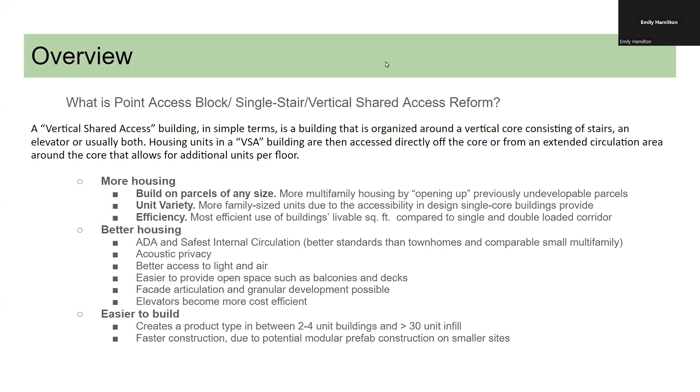Next slide. So what is it? Vertical shared access is a building layout that involves having a vertical structural core, most likely composed of an elevator and a stairwell that leads into units. Unlike what the colloquial single stair name may suggest, this layout is much less about stairs, but rather circulation inside of a building. It's about how people get in and out and move around to enter and exit units in a building.

Vertical shared access layouts are in many ways better than what we build today. And that is because they allow for one, more housing. You could build on any type of parcel size. Two, you could build any type of unit layout. Three, they're the most efficient with buildable layout.

They're better housing. They're better with ADA access. You can move to and from your unit from the outside easily. They're quieter buildings with more sunlight, with cross ventilation and airflow. And they're good with elevators on small parcels.

And lastly, they're easier to build because building constraints are lessened. You're able to build just about anywhere. And it's faster because you could standardize building. Next slide.

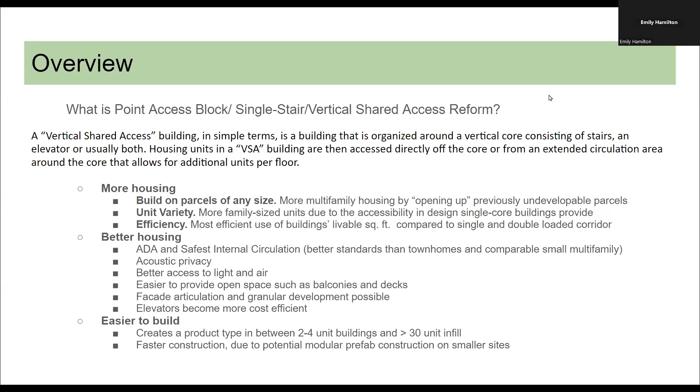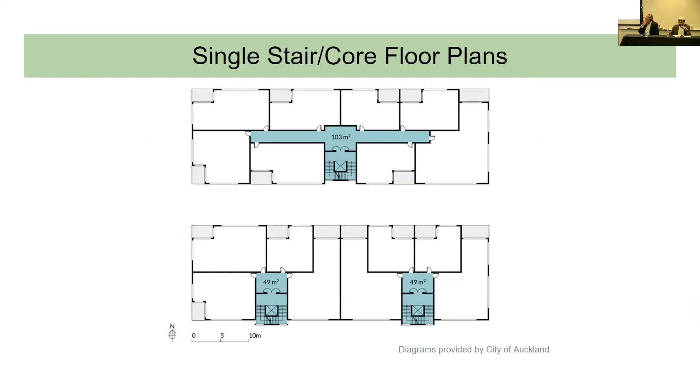So these are the typical floor plans of this type of circulation setup. Highlighted is a core consisting of stairs and an elevator. Notice that there are almost no corridors, and even the longest corridor out of these diagrams does not run the length of the building. All units feed off to the core. Next slide. So after all this praise, why don't we have this?

So in California and most of the US, we have something called the second egress requirement. What it says is that units in multifamily buildings must have two ways of entering and exiting a building. We also have another requirement that says that both ways must be through staircases. Though this requirement sounds innocuous and uneventful to building, far from it.

Next slide. The second egress requirement heavily influences how we build multifamily buildings in the US. It incentivizes large or full block buildings. It promotes thick bread loaf style buildings that utilize double loaded corridor setups. So think hotel corridors on large sites and motel style gallery access corridors on smaller sites. So like think a motel.

Having these forms of corridors then leads to units that motels and hotels produce, slot style homes that usually fall into studios or one bedrooms. These configurations have also started a current trend of windowless bedrooms in new developments. Typically, larger units could be built in these layouts, but they're often reserved as corner units, as overall larger units are much less efficient in floor space usage compared to one beds and studios. So naturally, less are built.

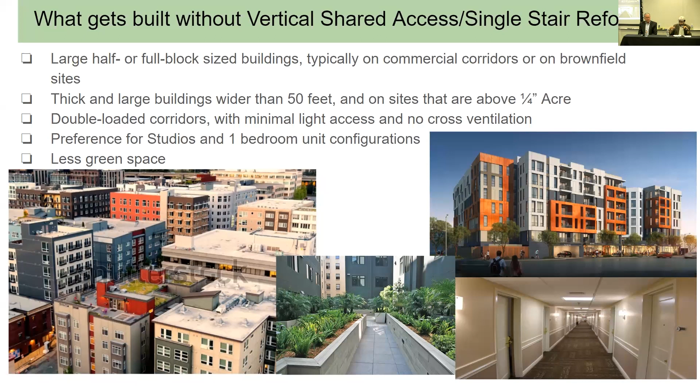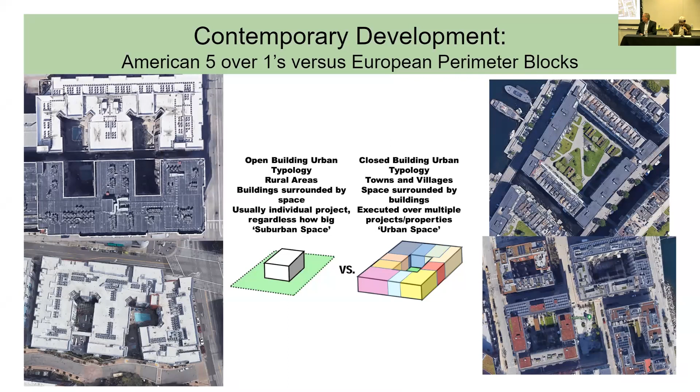On the left, we have some typical 5/1 block site developments. You can see that they're much wider than their European counterparts to the right. And what we end up getting in American building is less open space with very minimal advantages regarding density, as both layouts, left and right, are about the same size and same density. Next slide. So this is the meaty part.

Having a large site is all but mandatory, as you need to accommodate side-by-side units and a hallway with stairs and elevators. So think sites that are wider than 50 feet, and this is noting that most standard parcels in any typical city are less than 50 feet. So this makes land assembly common, and land assembly is expensive. In Los Angeles, land assembly increases land costs by 15 to 40%. A $1 million parcel sells for $1.4 million if you want to assemble two parcels side by side.

Units in this setup also get too much light or too little light because there's only one side of a unit that gets sunlight. You also get an overproduction of one beds and studios, like I previously mentioned, and they also are pretty terrible with acoustic privacy, as bedrooms and living rooms can't really be designed to be too far from your adjacent neighbor. You're right next to them.

Two, units can be built to have cross ventilation, have windows on many sides to get sunlight, and you get air and the whole package. And three, acoustic privacy. You could get acoustic privacy because architects have the freedom to build however they want, because they're not limited by a hallway, right?

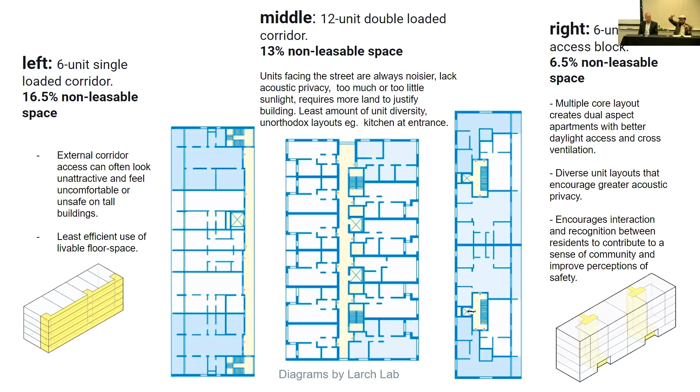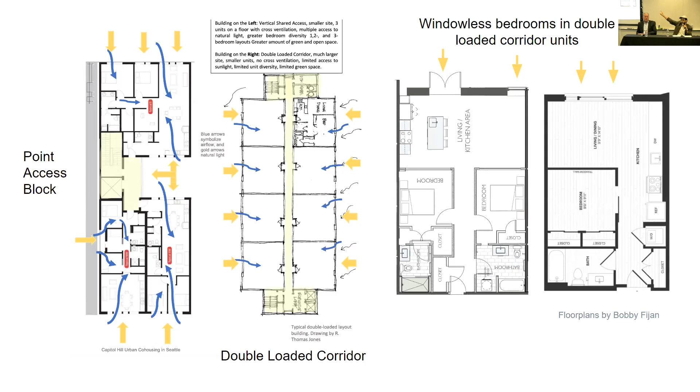Okay, next slide. Okay, so safety. So if it's so good, then why don't we have it? It must be unsafe. I mean, there has to be a reason why, right? Well, having a second egress requirement is a bit of a historical fluke. After World War II, insurance companies wanted to underwrite the mass construction of multifamily buildings nationwide for returning GIs.

Companies chose the 1902 New York City Fire Code to base their model after. New York had a pretty good record on fire safety, as the city hadn't had a major urban conflagration since the mid-1800s. They copied and pasted their building code, and the code had a second egress requirement. Note that this really didn't have much correlation to why New York buildings didn't catch on fire. Most buildings in New York were masonry built, and they've been masonry built since the mid-1800s. So they just did it.

So regional codes then copied insurance companies in the 1960s, and in the late 1990s, the IBC adopted the regional codes, and second egress requirements were never changed or substantially modified. All of this is to say that we don't fight fires the same way that we did in 1860 or 1902. We have modern sprinkler systems, fire-treated timber, pressurized stairwells, and even our furniture is fire-treated nowadays. The way we fight fires has evolved in some aspects in our code, but our second staircase requirement never evolved.

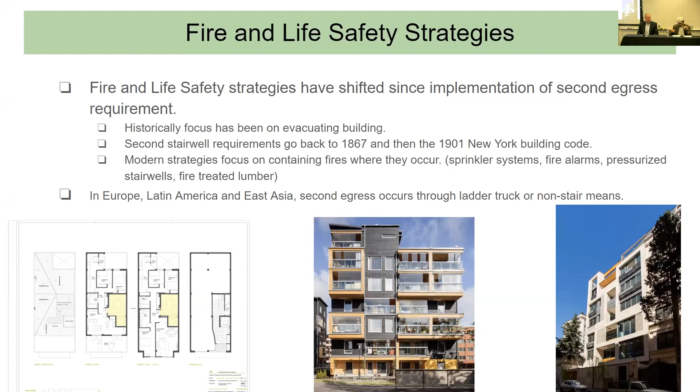Oh, believe it or not, vertical core buildings are legal in some American cities today. Seattle and, ironically, New York. They all have their own set of safety standards and mitigations. Seattle, for example, allows up to 6 stories, and they do pressurized stairwells, etc. And they get it built, and they seem to be fine with it. Next slide.

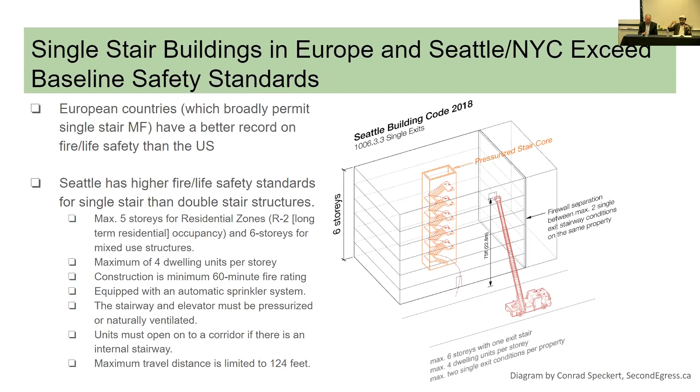So on an international level, the US, Canada, Nigeria are the only countries that have second egress requirements with stairwells. Countries around the world have different standards. Spain and Austria allow 10 stories, New York 6, Netherlands 5, depends on the country and the region. Next slide.

Okay, so let's bring it back a little bit. Why am I even asking for this? Or why are we even talking about this? Well, egress and stairway requirements have a profound effect on what gets built and what doesn't get built in our neighborhoods. Builders that focus on large sites that are half an acre don't really see an immediate advantage to vertical core circulation because their pro formas are set up to take the impact of whatever inefficiencies hallways may bring to a project. This cannot be said for smaller developers.

Current stairway requirements may eat up to a third of livable, developable space in a project. And a study in Virginia studying these effects saw a $60,000 per unit cost in having a second stairway requirement for small developments. Just like mandatory on-site parking, second stair requirements may kill the feasibility of small projects.

Next slide. So who builds today? Well-capitalized developers that could afford the cost of land assembly and any cost and inefficiency that contemporary building brings. So think big buildings that you close your eyes, you've seen them.

Who can't build? Small developers trying to move up the value chain from building ADUs to fourplexes, homeowners or small property owners that want to build something on their lot or multifamily on their lot, or community land trusts or cooperatives that do not have the same funding or may be limited to how much land they own, as opposed to traditional, larger nonprofit affordable housing developers that usually tend to develop projects over 50 units and utilize tax credits. Next slide.

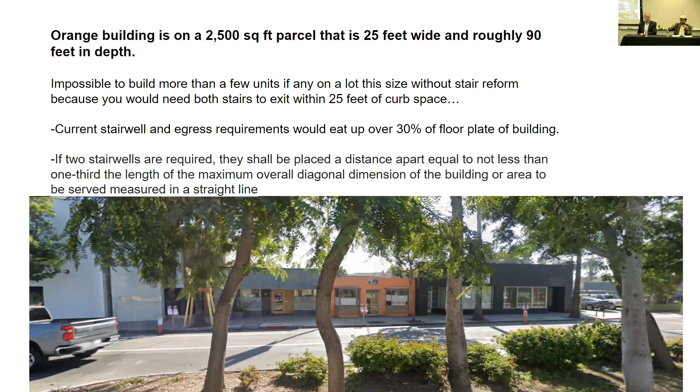All right, so this is the lightning section. This is Culver City. This is a typical commercial main street in Culver City with small commercial parcels. Today, you can't build anything here. It's really hard to assemble the land. But we have hundreds or thousands of these parcels in Culver City, and we have tens of thousands of these parcels throughout California, if not more.

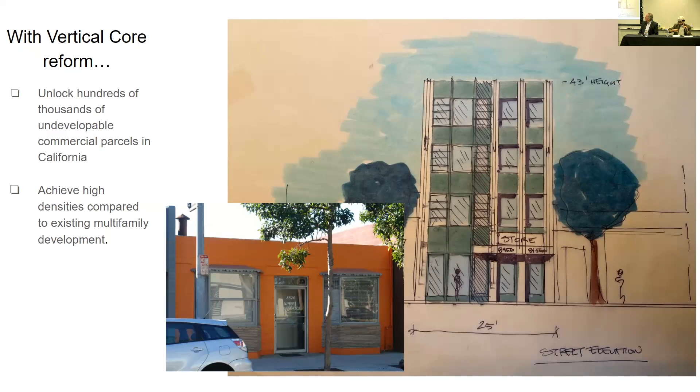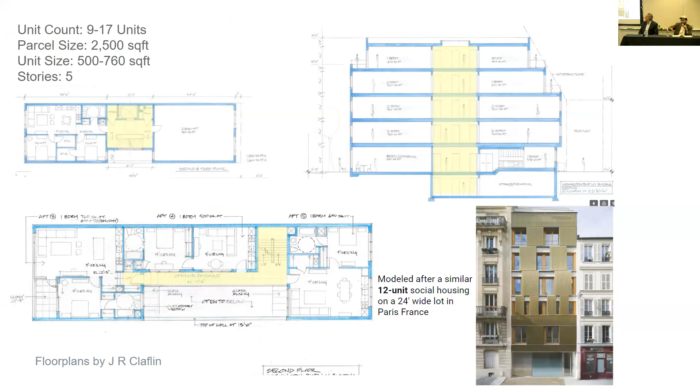Next slide. With vertical core reform, we could have any size lot turn into potential affordable housing. Any size lot. Next slide. Here are some layouts of how they look inside. To the right is a social housing development, 12 units in Paris with only 24 feet width. Next slide. This is co-housing in Seattle. Next slide.

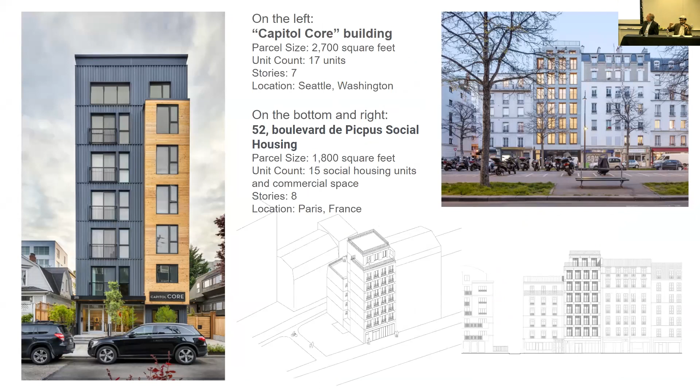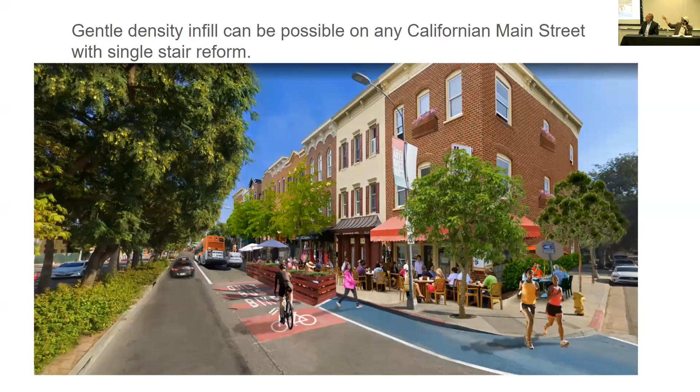To the left is Seattle, to the right is Paris. So this is very typical of what we build today. We just can't build it here. Next slide. This is Culver City again, the Move Culver City, which is super great with their bus lanes and protected bike lanes. They still can't build the housing. Next slide. That's how it looks with housing. Looks nice, right? Next slide.

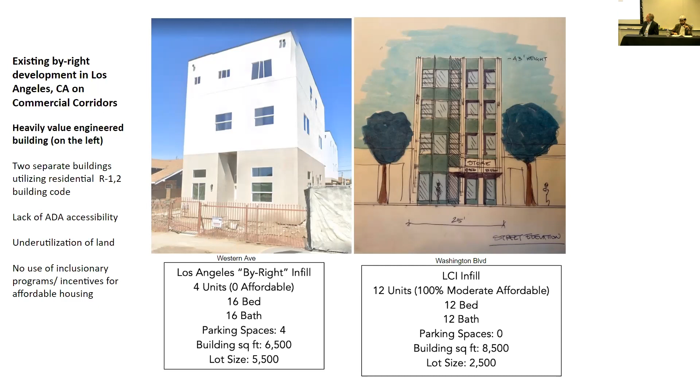Smaller developers will build these substandard structures to get around building code, usually utilizing the R1 and R2 residential code, meant for very small projects that contain up to 20 families. This is a detriment to ADA accessibility. These buildings have weaker fire and life safety standards, and most importantly, they lack affordable housing. Next slide.

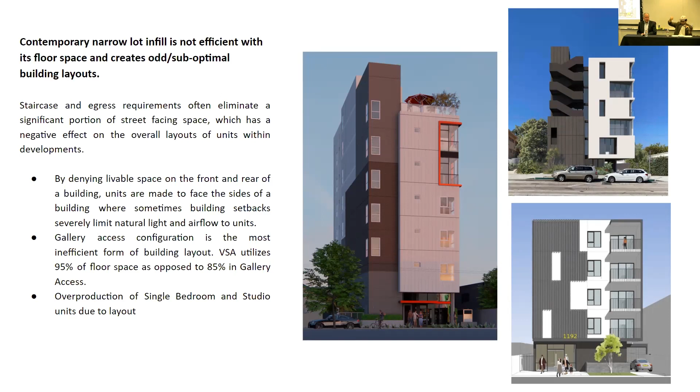Better funded developers who try to build the good way are also limited in what they could build on small sites. As you can see to the left, it looks like no windows, right? You know what's behind those windows? A staircase and a corridor. About a third or half of the building is just wasted just because of our building code. Crazy, right? Next slide.

I keep on talking about small construction. Mike Eliason in Larch Lab conducted a fascinating study on larger developments utilizing this form of egress circulation. I invite you to check it out. They found that this works perfectly fine and is cost saving. It produces better units on larger buildings as well. So this could also apply to very large affordable housing tax credit projects. Right now, as everyone knows, they're really expensive to build. We could get them built cheaper.

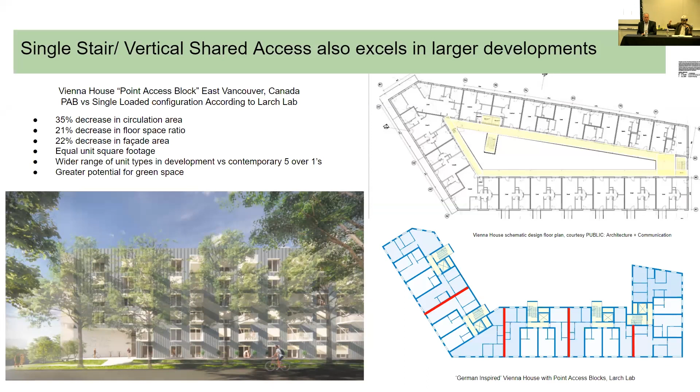Next slide. And lastly, right now we are not building enough housing for all people. We are focusing on a very small niche. I don't know if it's on purpose or not, but this has to end. We have to be able to expand how we build housing and the types of housing that we build. It's good for climate, it's good for society, and it's good for equity's sake.

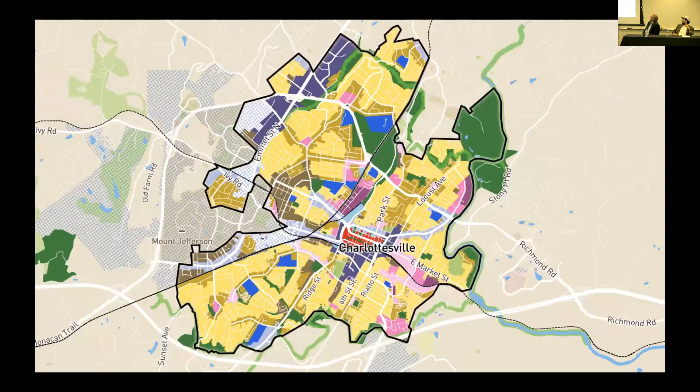Okay, thanks so much, Shane, and to the UCLA Lewis Center for hosting this discussion, and to everyone joining this afternoon. I'm going to talk a little bit about the proposal under consideration in Virginia to implement this single stair reform, based on the work of Mike Eliason, who Ed mentioned, as well as Conrad Eckert, 2 architects who have been really influential in spreading the unusual case of the second egress requirement in the US and Canada, and who really started this discussion.

Lyle Solla-Yates and Rory Stolzenberg, 2 members of the Planning Commission in Charlottesville, Virginia, really initiated this discussion here in the state following the work that they did to implement a new comprehensive plan in Charlottesville.

And I saw that Lyle is watching the discussion this afternoon, so perhaps he can join in with some updates from the latest policy developments in Virginia, but I'll be covering that background.

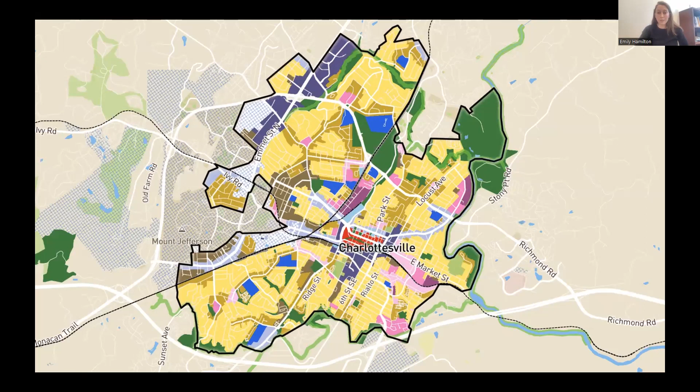So the Charlottesville comprehensive plan basically implemented this new kind of beige area of medium intensity residential, as well as many changes, but this is the one where it seems to me the single stair reform would have the biggest effect, because this new designation within the comp plan allows for development up to 4 stories and 12 units per lot, which, if we think about it, is just a really difficult configuration to achieve with the second egress requirement.

You're not really going to be able to build a feasible building that includes 4 stories and 12 units, as well as 2 staircases with a corridor connecting those. Your entire building is going to be eaten up with circulation, and it's going to be very inefficient.

In the Virginia discussion, the primary consideration against the move to the single stair plus an external fire escape option for buildings up to 6 stories is coming from the Virginia Department of Fire Programs. And it's really, really important to consider fire safety anytime we are talking about changes to the building code, including fire safety professionals, architects, and code consultants in that discussion.

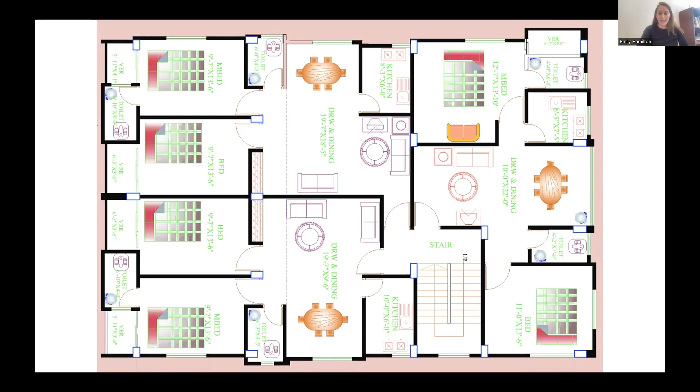Because of the safety concerns, when we're talking about code reform, economists and other academics who touch on the land use regulation and housing affordability space have been very hesitant to get involved in any building code issues. Alain Bertaud, who many of you may be familiar with, is an urban planner who straddles the planning and housing economics space. He has advocated a research agenda that focuses on reforming barriers to lower cost construction that a typical consumer can readily evaluate with their own eyes.